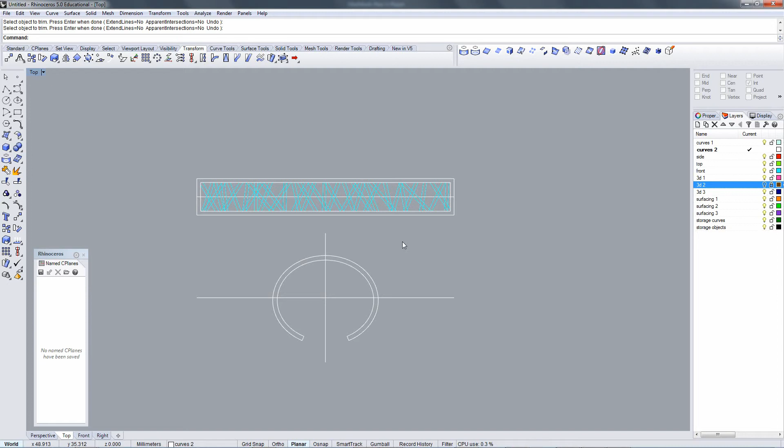This is the image of Harper's design that we have traced into Rhino, and now I'll make a maquette. First thing I need to do is bring this into three-dimensional space. To do that, I'm going to grab all of her curves for the top view, and move them into the center. I'm going to put these all on one color layer.

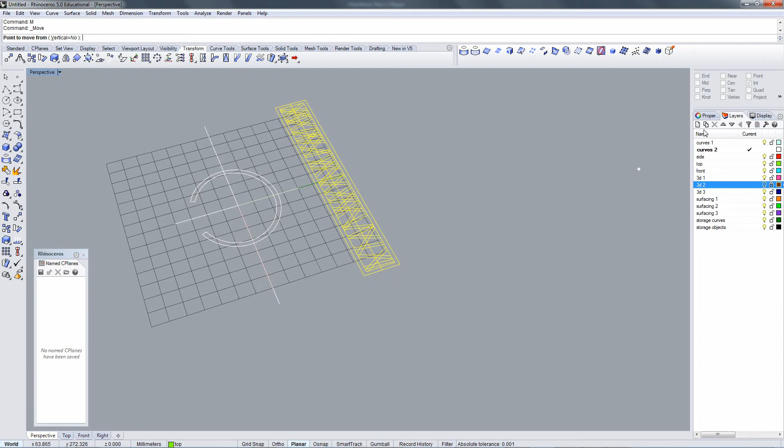I'll put them on the green. Using center snap to grab the center of this box, put them at 0.

Next thing I'm going to do is grab the front view of Harper's cuff, and I'm going to rotate that up into position for a front view. Like so.

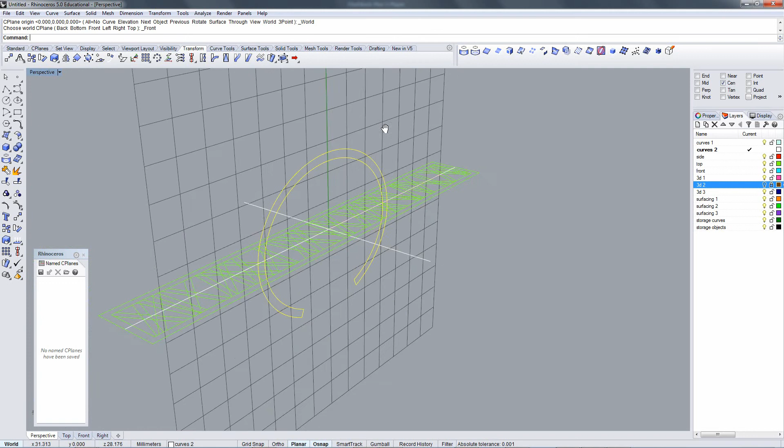Now I'm going to extrude Harper's front view so that it is the proper thickness. Solid option and snap. Like so. There's a basic maquette of Harper's cuff.

Now I need to be able to flow the lines onto this, so I'm going to have to explode this. So I have this surface. I need a line down the center of that surface. The easiest way to get that line for me is going to be to extract an isocurve using mid-snap.

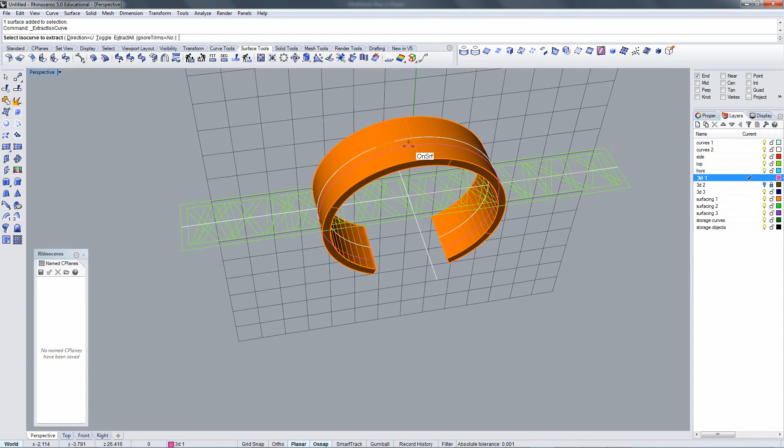Actually, I don't even need that. I already have the curve here in her drawing. I'll just explode her front view. So I have the curve already in place. Hang on one second. Okay, sorry, I hit cut accidentally.

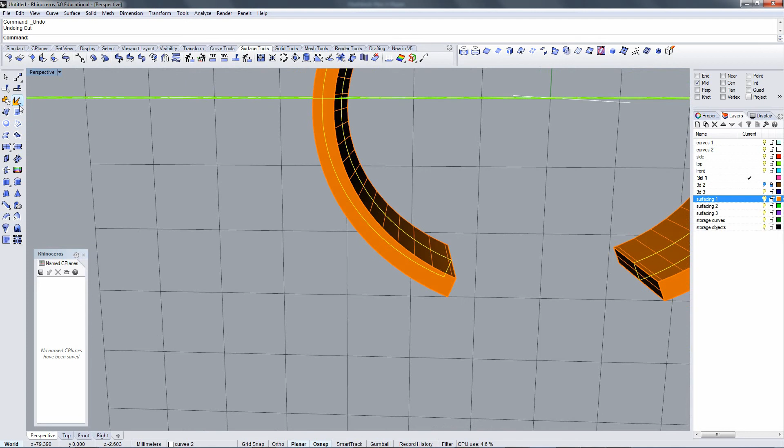Alright, there we go. So there's the curve. When you flow along curve, which is the command we're going to use, you have to have a flat reference curve and a three-dimensional target curve.

The reference curve and the target curve have to be the same length. It's also helpful if they have the same math, meaning the same number of control points and the same degree of curvature. I'm going to check what the math on this curve is now by applying a rebuild command.

Right now this curve has 9 points and it's a second degree curve. That is not enough. Well, it will work, but if it were any more complex it wouldn't work with what we're trying to flow. So to be a good example, I'm going to give us plenty of points here.

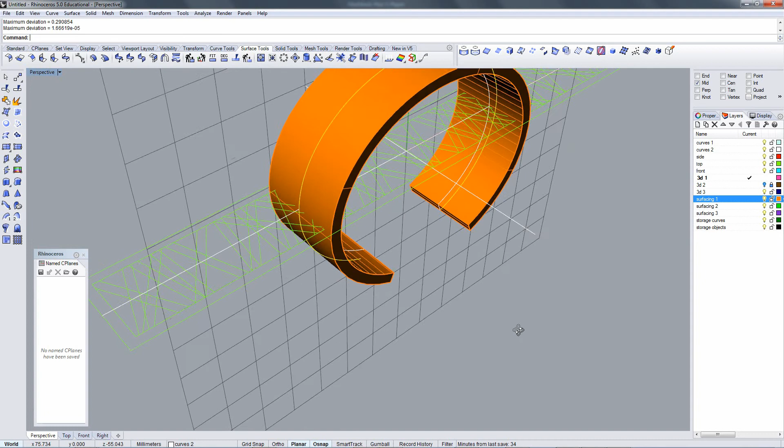I'm going to go to 36, and the 4 is fine for the degree. I'm going to give the same math to this curve. And the numbers are still here. That curve was 2 and 1. It'll also be 36 and 4.

So if I turn the control points on for these two curves, they will look very similar. And that's what Rhino uses when it's flowing geometry. It's taking this point, comparing it to that point, taking this point, comparing it to that point, and so on. That's why, if you have just very few points, it's hard for Rhino to give you a good flow. As far as how many points, that's a matter of experience.

I have found that for most circles or ellipses, 36 is fine. If it's a closed circle or an ellipse, which this is not, but if it is, I also like 36 because it's divisible by 4. And if you have a point count that's divisible by 4, it'll keep your quadrants, which are useful for snapping to later. So basically it's a work habit.

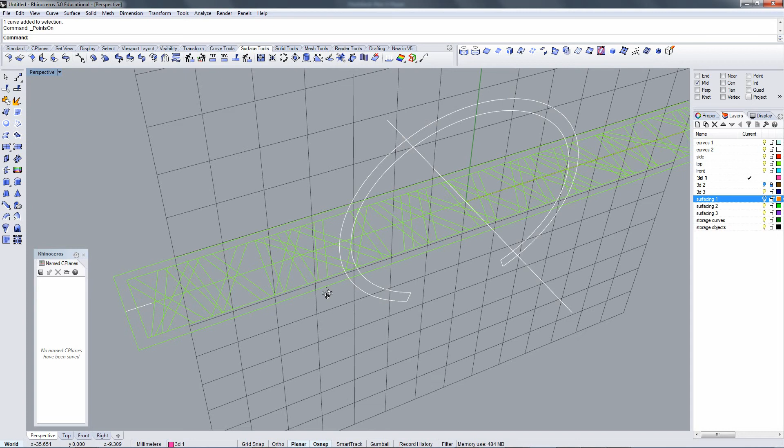I'm going to select Harper's top view, and I'm going to flow it along curve. Transform, flow along curve. Actually, I don't want to flow this. I'll take that curve out.

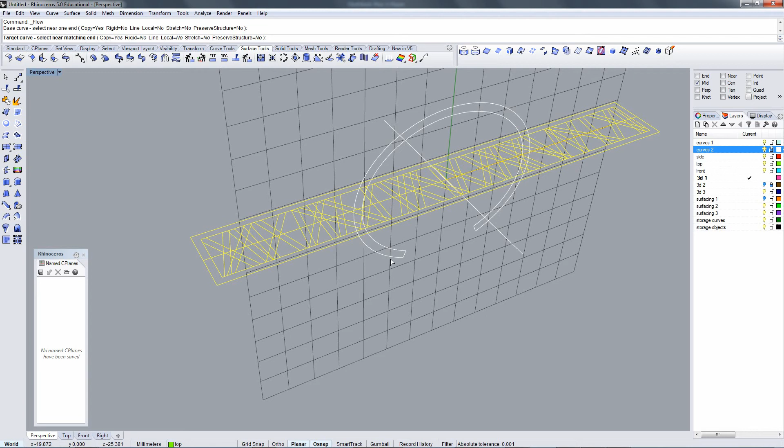Transform, flow along curve. Base curve. This is the original curve. Pick near the end. Target curve, pick near the end. Oh, it's locked.

And you'll see that Parker's curves have been moved and wrapped around the surface of the object. So I don't have her original top view curves in the way. I'm going to go back into the top view, and I will move them up and out of the way, just to tidy things up.

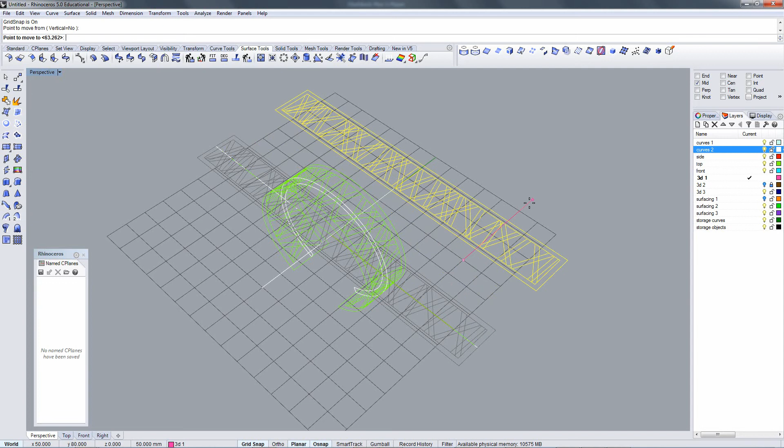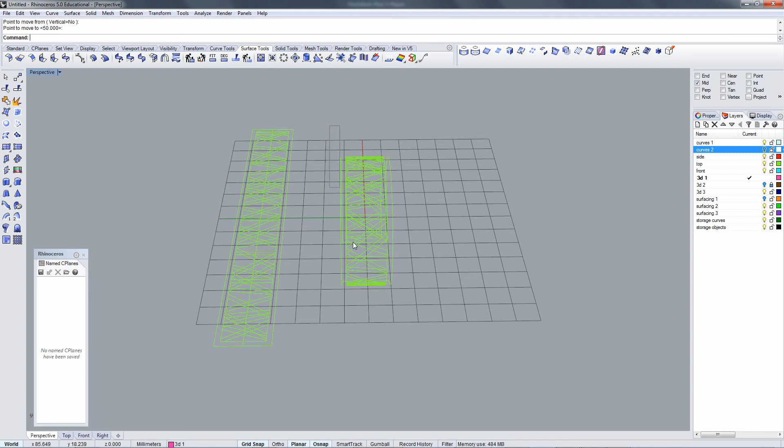So there are Parker's curves. Now I can turn off these curves, move this up into position to join its partners. I'm going to put these curves on a different layer. I'll use the light blue. Turn off this curves layer so we can see clearly what we have. Turn back on the surface object.

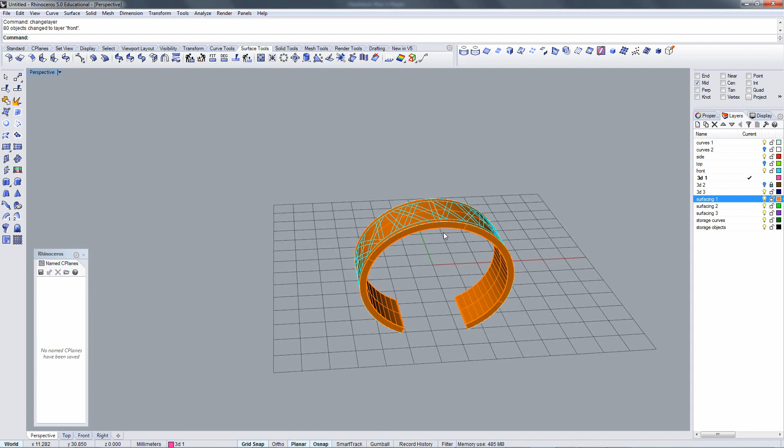I am going to grab all of these and have Rhino make a drawing for Harper. Sorry, I keep getting your name wrong.

What's important here, though, before I do that, is when you make a 3/4 view, you lose accurate scale. Rhino doesn't have anything here that is actual size to grab. So in order to alleviate that, we're going to put a reference object in here that'll make it easy for Rhino, or at least for us, to get this actual size after the fact.

I find the most useful object is a sphere, because a sphere is the same size from every direction. Solid object, sphere center radius. I'm going to pick quad or mid. Going to grab the very top because this is the point where it's the most important to have it actual size. And 10 millimeters should work.

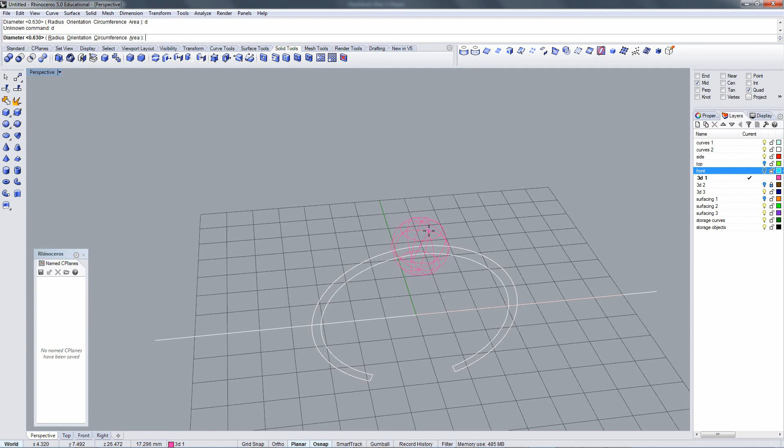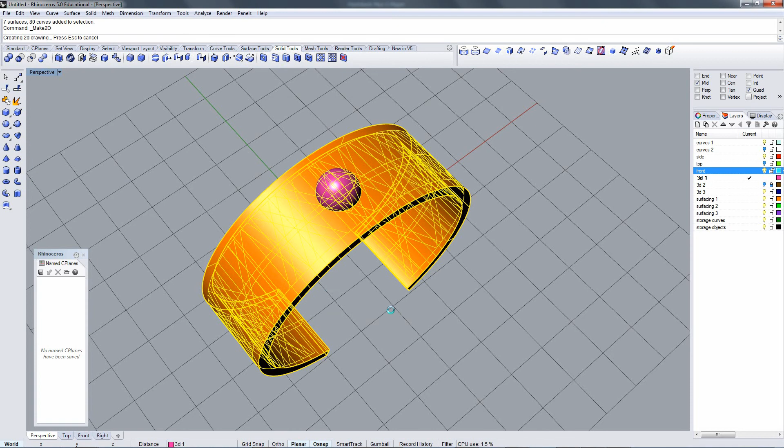So I'll do a 10 millimeter sphere. Okay, I'm going to now take all of these. I'm going to select a view that I think is nice. And I'm going to go to Make 2D Drawing, Current View, and hit OK. And Rhino will make a drawing.

Okay, I'm going to group those lines together so I can select them all at once easily. And I made a mistake.

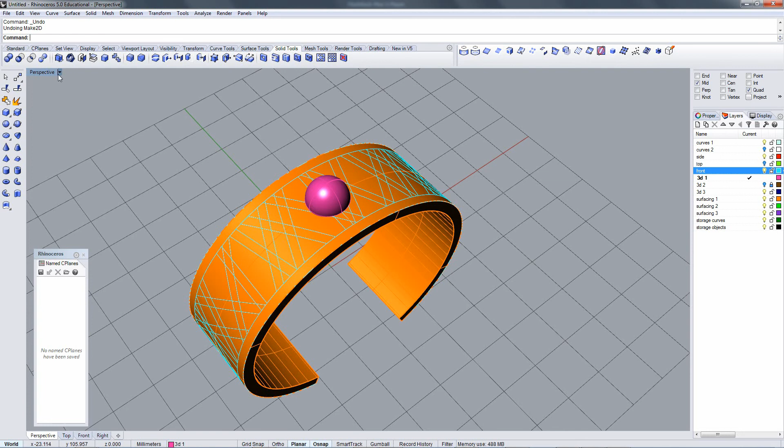Sorry. Before you do this, you have to save the view because you're going to want to get the same view twice. So to get the same view twice, either you have to make sure you don't revolve, or you have to go to Views, Set View, Named Views, and then save this view. Call it anything you want. I'll call it 34-1 for 3/4 view 1. Now I have that view available whenever I want it.

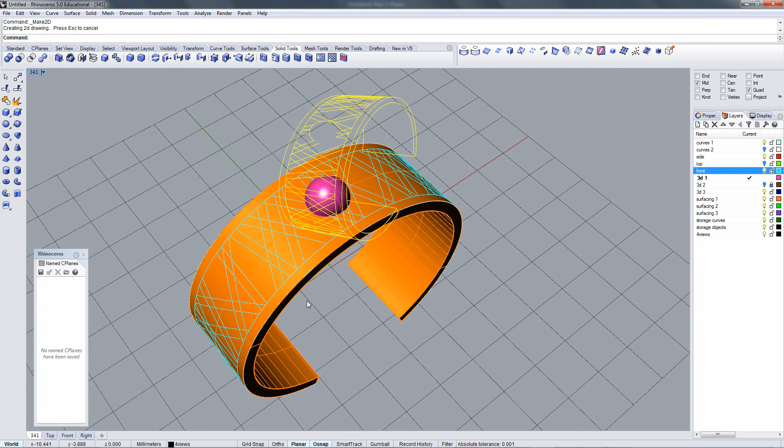Do the same process again. Control A, Make 2D Drawing, OK. Group. Going to turn off the orange and the blue. Going to select the red ball. Make 2D Drawing, Current View, OK. Don't need to group that.

Going to turn off the ball. I want to lock the 4 views so that I can't select them accidentally. Bring back the drawing. Make sure my view is the right view. So I can come here, Set View, pick 341 off the bottom. It didn't move, but if it had, that would restore it. Select everything. Notice the background drawing is not selected because I locked it.

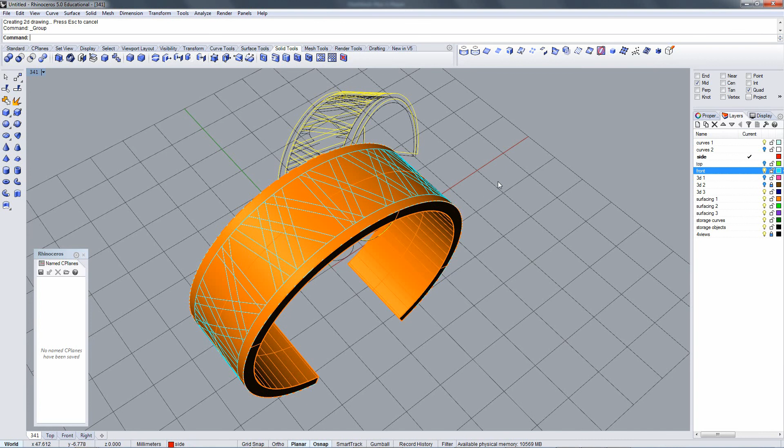Dimension, Make 2D Drawing. OK. And group. Alright, so I have several drawings to play with here.

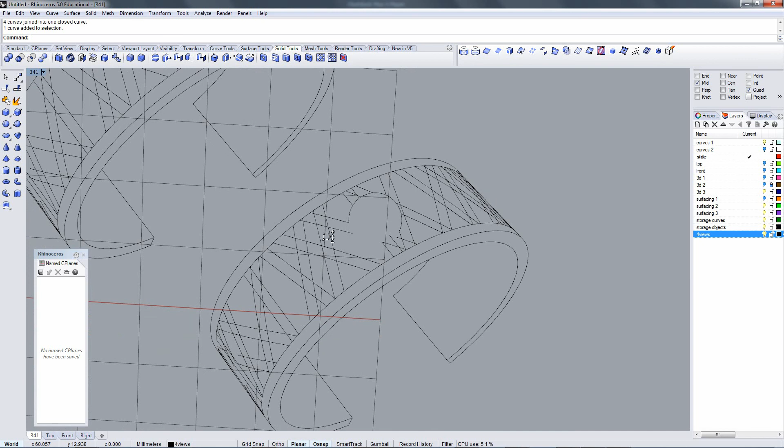Unlock this. Going to separate these drawings from each other a little bit. Join that together, so I have 3 pieces here. The main purpose for this piece is to be able to come in here and restore this circle.

Rhino got lost with part of the circle here. But see, it's not going to work. I'd hoped that Rhino would preserve the scale. It didn't. So, okay, I can't use that cheat that I would like to use.

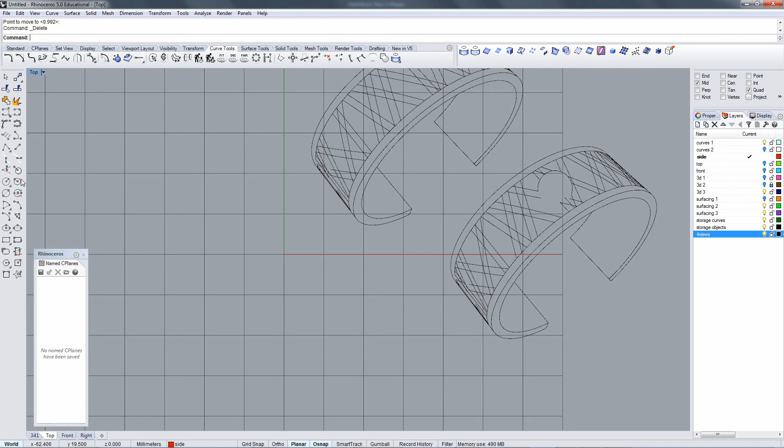By the way, I've gone into top viewport from perspective. I'm going to draw a simple circle. Diameter, do it right in the middle. 10 millimeters. This is how big this needs to be.

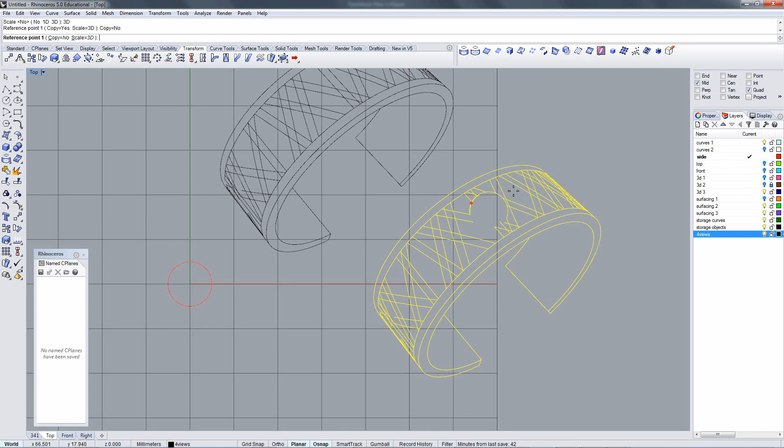I'm going to grab this, and I'm going to do transform, orient 2 points, scale equals yes, copy no. It would be lovely if enough of this circle survived that I could grab either a top quadrant or a bottom quadrant or side to side. I can't, but I can grab these 2 quadrants.

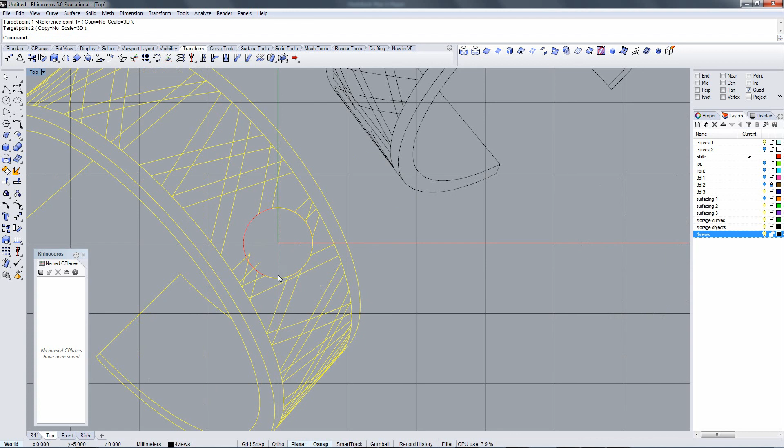Unfortunately, those will not align with this quadrant very well. But I can still use it to get the size. I'm going to re-rotate that drawing, and it doesn't really matter if I match the exact rotation I had before, because this is just an illustration. So I could actually change the rotation if I liked a better angle.

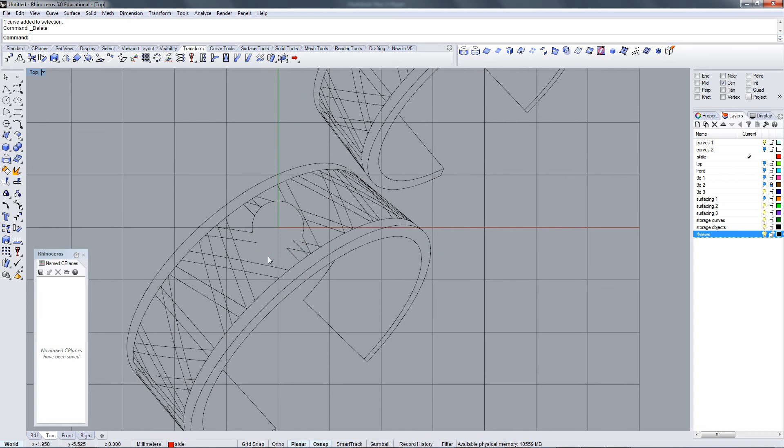There we go. Only problem with this, of course, is it has a great big ball in the middle of it. Going to grab our second clear drawing here, and I'm going to do the same orient 2 points command. Copy no, scale yes, 3D.

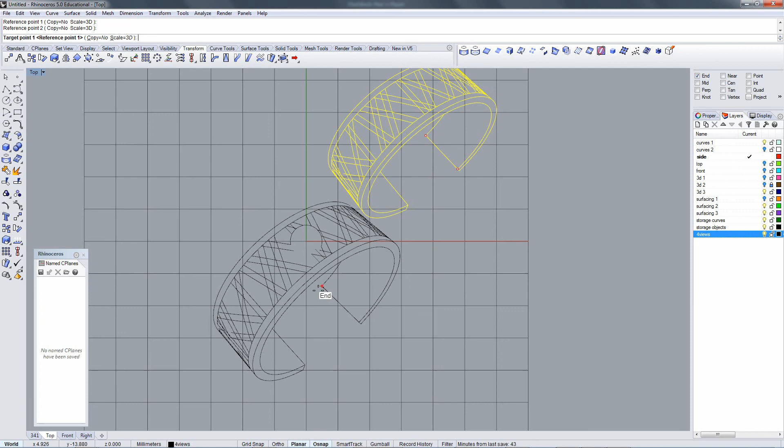Going to go to my end snap, and I can grab any 2 points on here that I know I can duplicate here. And the most obvious are here. Reference 1, reference 2, target 1, target 2. The exact same drawing.

Throw away the drawing without the red ball. And that is an actual size 3/4 view of Harper's cuff. Put it someplace nice in the middle. And that's it. This will match up with her flattened top view.

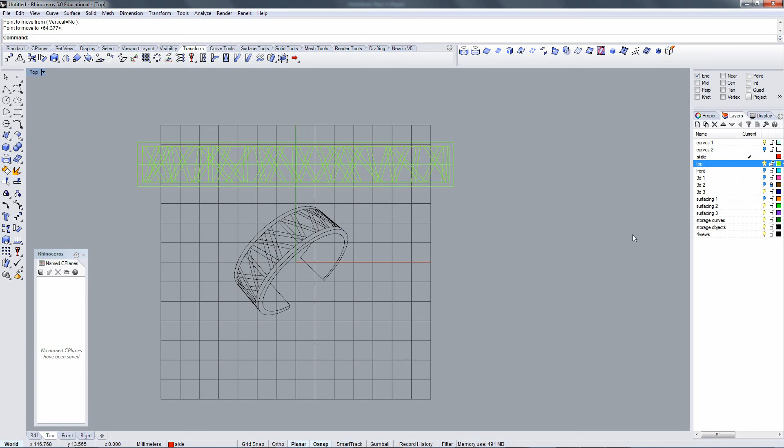It is actual size based on her drawing. So now what she needs to do is take these lines out of Rhino, either by printing them out or exporting them as an Adobe Illustrator file and taking them into Painter or Photoshop, and trace and draw her pattern as per her original design. And that is it.